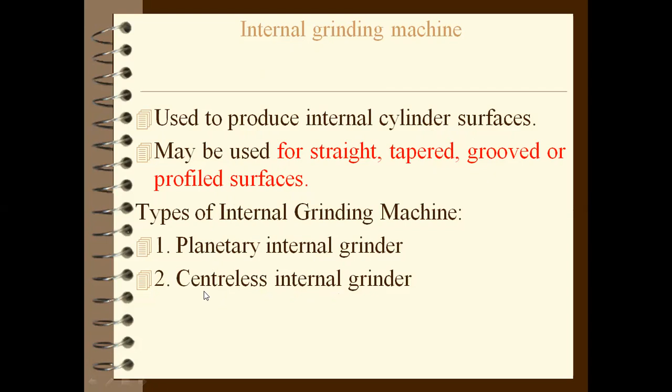Continuing from the previous session, we discussed different types of grinding machines, including the cylindrical grinding machine and its three types: external cylindrical grinding machine. Today we are going to discuss the internal cylindrical grinding machine. This machine is used to produce internal surfaces, which may be straight, tapered, grooved, or profiled. It is further classified as planetary internal grinder and centerless internal grinder. Today we will discuss both these types.

This is the figure regarding the planetary internal grinding machine, and you have to draw this figure in your examination, or this figure may be given and you have to identify the different components of the grinding machine and the grinding wheel.

This is the headstock of the machine. In the headstock, a gear mechanism is used, and power is transmitted to the chuck through the headstock, just like a lathe machine. This is a chuck, maybe 3-jaw or 4-jaw, which rotates due to the headstock and spindle. The workpiece is mounted in the chuck, and you have to grind the internal surface of that workpiece.

This is the internal surface of the workpiece, shown here in sectional view. This is the thickness of the workpiece after taking the section. These two lines represent the internal cylindrical surface, which is a hollow workpiece, into which you can insert the grinding wheel.

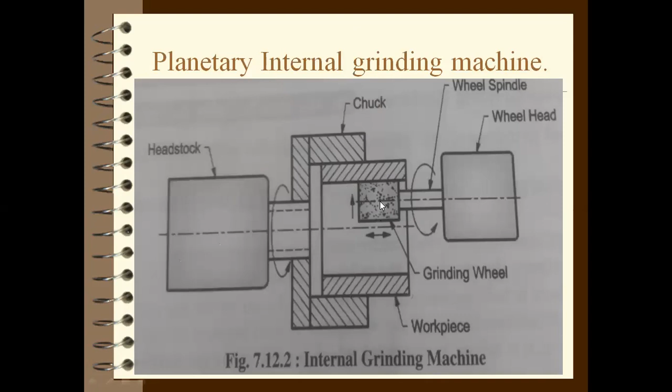The grinding wheel has both longitudinal and cross feed. Longitudinal motion is this movement along the length, and the cross feed means the grinding wheel moves towards and away from the operator. This motion, called feed or cross feed, causes the grinding wheel to touch the workpiece for grinding.

Application: the internal grinding machine is used for grinding the bore of gears, bore of cylinders, inner surface of ball bearings, rings, etc. Internal grinders of chucking type may be classified as plain and universal grinders.

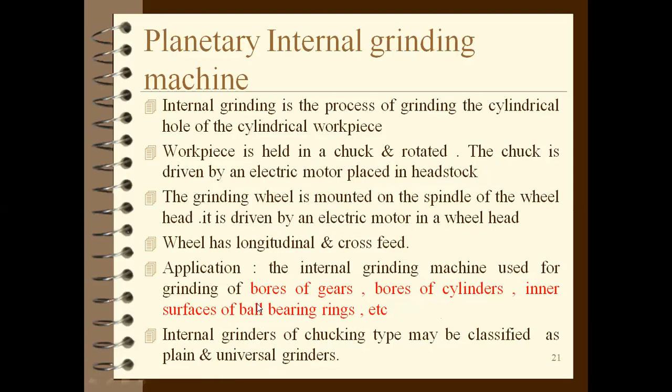Now what is planetary, the planetary internal grinder? In a planetary grinder, the workpiece is mounted on a reciprocating table. That means the workpiece itself is not revolving; with respect to the table it is stationary, but since it is mounted on the table, it also gets a reciprocating motion while remaining stationary otherwise. Instead, the grinding wheel is given a rotary motion.

This is the grinding wheel. This is the front view, and this is the side view of the image. If you look from the right side, you get this right hand side view. This is the workpiece, and this is the grinding wheel shown here. Here you can see the width of the grinding wheel, and in this view you can see the diameter of the grinding wheel. The grinding wheel is given a rotary motion.

The rotary motion is given here, along with a planetary motion, to grind a cylindrical hole. The grinding wheel rotates about its own axis, as well as about the axis of the workpiece. This is the axis of workpiece. So that is a planetary motion, just like our Earth, which rotates around its own axis and also around the sun. That's why it is called a planetary internal grinder, or planetary internal surface grinder.

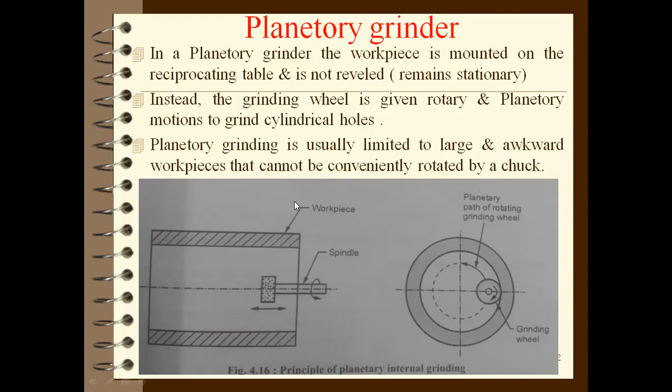Now the second type is the centerless internal grinder. As seen in the previous lecture, centerless grinding of external surfaces exists, and centerless grinding of internal surfaces is also carried out. This is the workpiece, and on this workpiece you have to grind the internal surface. This is the internal surface, and you have to carry out the grinding process on it.

But when the length of the workpiece is too small and it cannot be held in a chuck, you have to carry out centerless grinding. So the workpiece is not supported anywhere. This is the regulating wheel, as seen in the previous lecture, used for holding the workpiece and for pressing it towards the grinding wheel. These two wheels are the pressure roll and the supporting roll.

When the workpiece rotates in clockwise direction in centerless internal grinding, the regulating wheel rotates anti-clockwise. When the regulating wheel rotates anti-clockwise, the pressure roll and supporting roll also rotate anti-clockwise. And when the workpiece rotates clockwise, the grinding wheel rotates clockwise. You have to understand the direction of the wheels for MCQs.

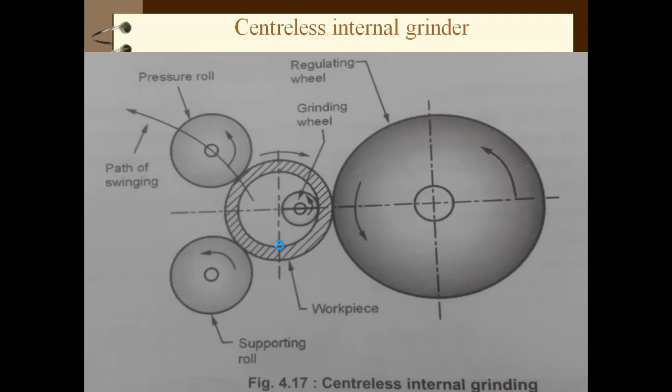Concentricity means there is no thickness variation throughout the diameter. The inner diameter and outer diameter of the workpiece should be concentric, so that the thickness measured at any place is equal - that is the concentricity of the ground internal hole with the external surface of the workpiece.

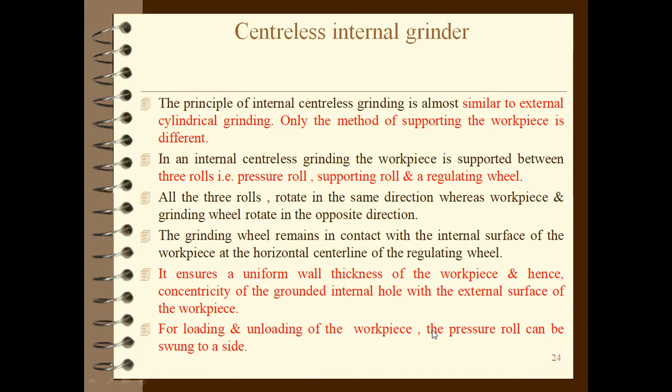For loading and unloading of the workpiece, the pressure roll can be swung to a side. As we saw in external grinding, to grind throughout the length you tilt the regulating wheel through some angle so the workpiece moves linearly or axially. Here too, for loading and unloading, the pressure roll can be swung aside.

Next is the surface grinder. Surface grinders are used to machine flat surfaces and irregular, regular, or tapered surfaces. As per the table movement and position of the spindle, surface grinders are classified accordingly.

You have to remember the motion of the table in different types of grinding machines - that may be asked in examination: which motion is given to the table and which motion is given to the grinding wheel. Depending upon the table movement and position of the spindle, grinding machines are classified as reciprocating table and rotary table.

A reciprocating table is further classified as horizontal spindle and vertical spindle, and a rotary table is also classified as horizontal spindle and vertical spindle. Now let's look at the reciprocating table type surface grinder - moving on from cylindrical grinding, which we learned in the previous session, to surface grinding.

Surface grinding means flat surface, using a reciprocating table type. This table is reciprocating, and the workpiece is held on the table, so the workpiece and table both have reciprocating motion.

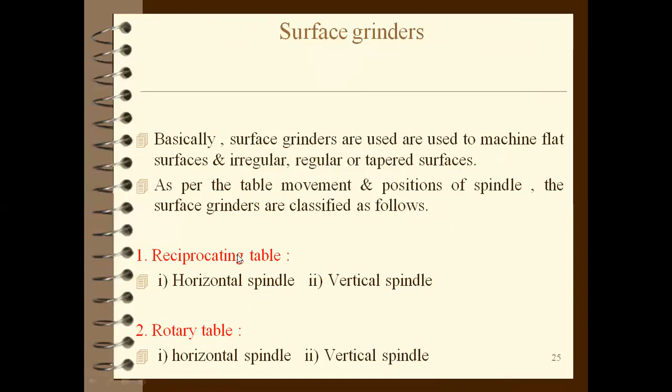Working of reciprocating table surface grinder with horizontal and vertical spindle: the horizontal spindle carries a straight wheel, whereas the vertical spindle machine carries a cup type wheel. The cutting action is carried out by the periphery of the straight wheel in the horizontal spindle machine, whereas it is done on the revolving edge of the cup wheel in the vertical spindle machine.

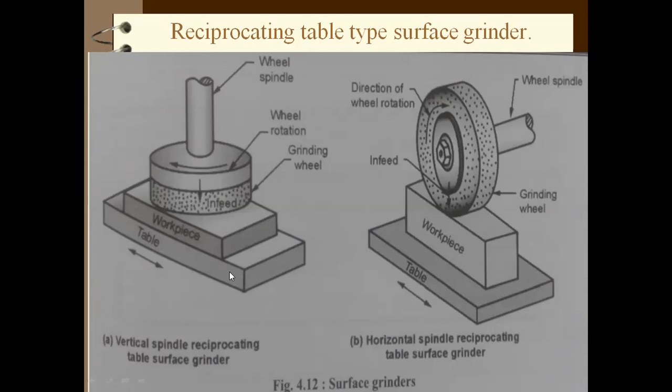On these machines, the workpiece is generally held on a magnetic chuck, so that it can be held or clamped properly on the table, since there is no extra clamping arrangement given to the workpiece. This magnetic table firmly holds the workpiece due to magnetism.

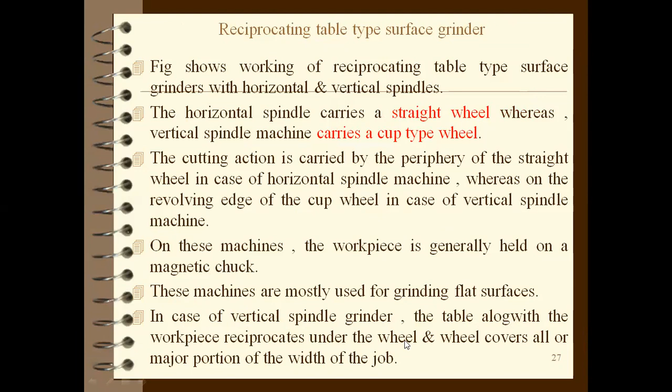In case of vertical spindle grinder, the table along with the workpiece reciprocates under the wheel, and the wheel covers the major portion of the width of the job. This is a rotary table - here the table is rotating, unlike the previous reciprocating table. To rotate the table, a special electric motor is needed. This is a rotary table horizontal spindle, and this is a rotary table vertical spindle.

For giving grinding throughout the diameter of the workpiece, the cross feed is given to the spindle here. See here, cross feed: the grinding wheel along with the wheel spindle is moving forward, and complete diameter will grind.

At the same time, the workpiece is rotating also. Workpiece is stationary with respect to table, but the table is rotating, so workpiece is also rotating, and that is a vertical spindle, rotary table type surface grinding machine. In this machine the workpieces are held on the magnetic chuck and arranged in a circle.

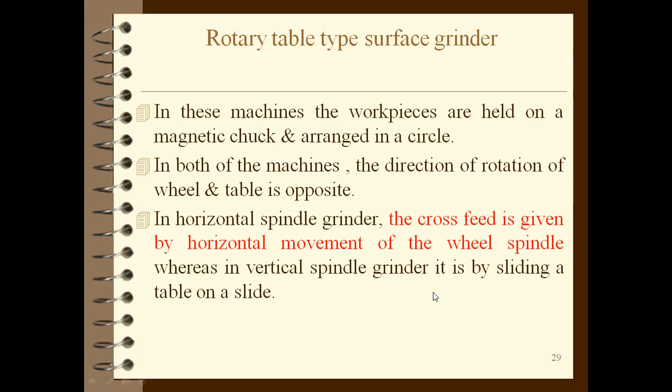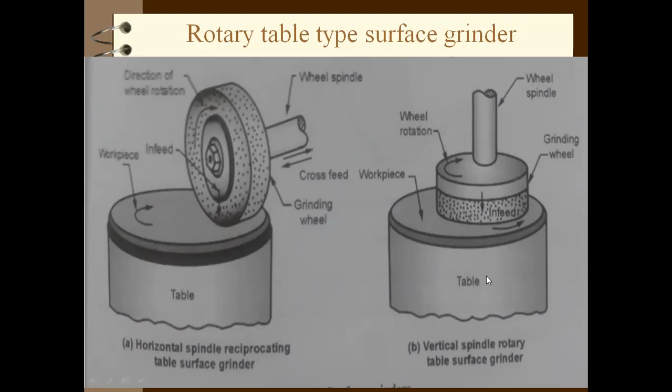Here the wheel is vertical spindle, the table is sliding as well as rotating, as the workpiece is placed in this position. Here for grinding that workpiece, the surface of the workpiece, the table is sliding also.

Here is a vertical spindle rotary type grinding machine. Here is a vertical spindle reciprocating type grinding machine. So by giving the figure, you have to identify the name of the grinding machine here.

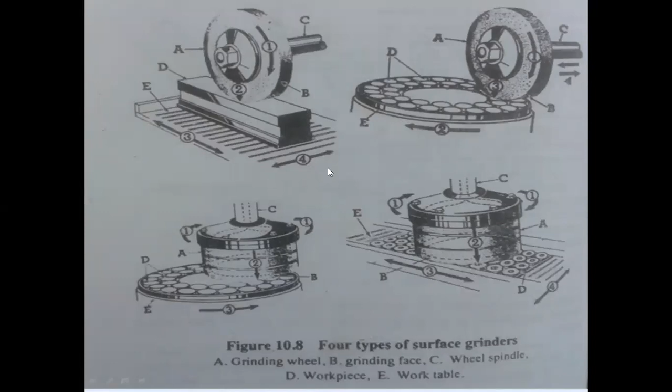Next is the tool and cutter grinder. This is an important point from the exam point of view: tool and cutter grinder or bench grinder. So this is mounted on this; this is a grinding machine.

A cylindrical or circular wheel is mounted on one side, and a conical wheel is mounted on the other side of this wheel head. So at a time, if you switch on the machine, both the circular grinding wheel and conical grinding wheel will start rotating, because this is mounted on the same spindle. On the same machine you have to grind external surfaces, and you can grind if the workpiece is having a conical surface, cylindrical surface, or step surface. This grinding wheel head is getting power through this column and electric motor.

This is a table, and the table is mounted on a saddle, and the saddle is mounted on the base. So this figure you have to remember, and you have to draw it in the examination. That is a tool and cutter grinder. It's a very simple figure, and this may come in the examination for descriptive type questions. This description you have to remember.

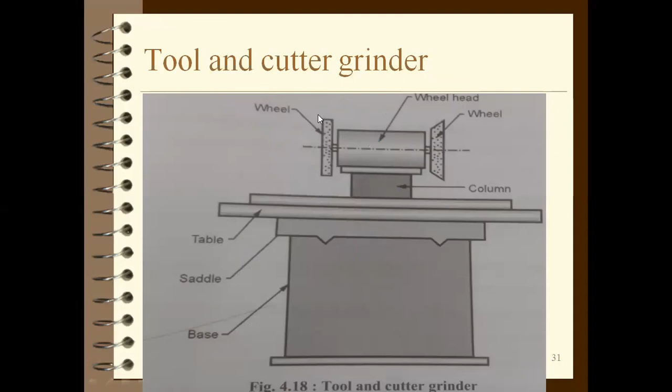Tool and cutter grinders are mainly used to sharpen and recondition multiple tooth cutters like reamers, milling cutters, taps, hobs, and other types of tools used in the shop. This tool and cutter grinder is also present in our workshop; you can see it by visiting the workshop. With various attachments, they can also do light surface, cylindrical, and internal grinding to finish items such as jigs, fixtures, dies, and gauges, and sharpen single point tools.

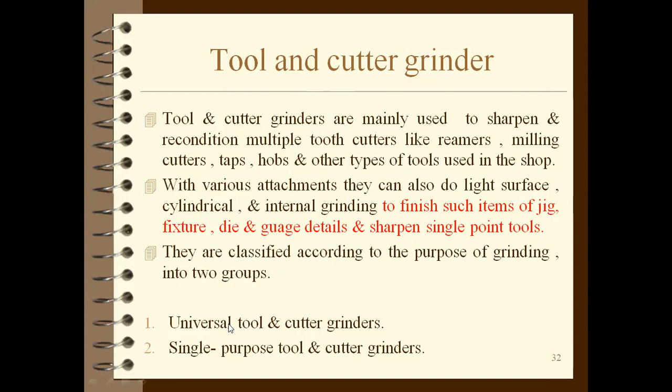They are classified according to the purpose of grinding into two groups: universal tool and cutter grinder, and single purpose tool and cutter grinder. Universal tool and cutter grinders are particularly intended for sharpening miscellaneous cutters, and single purpose grinders are used for grinding tools such as drills, tool bits, etc.

in large production plants where a large amount of grinding work is necessary to keep production tools in proper cutting condition. In addition, tools can be ground uniformly and with accurate cutting angles. A typical tool and cutter grinder is shown in the figure.

So that much is for today's lecture. You have to understand all the grinding processes. You can see the previous YouTube videos also for understanding all types of grinding machines. So in the next lecture we will start the different shapes of grinding machines.